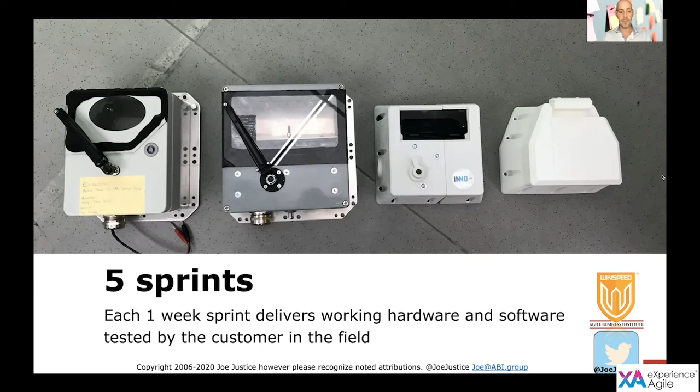It went for sale. The point I'm trying to make, a sprint in hardware does mean it is deployed and it is being used by the customer for real feedback. And these are 1 week sprints, and in 5 sprints, hardware, software, electronics are deployed to complete the products for sale. Here's what it looks like in manufacturing.

Well, it's robotic integration. The robots have flexible hands, so they can hold different parts because they're getting different parts 27 or more times a day. So the robot hands need to be programmed to hold the different part, and then they connect them. Next, the mating surfaces on the parts have known stable interfaces. You can see they're mostly flat to simplify the mating, the connection of the parts, but they're not all flat. As long as the interface is the same, the rest of the part can change as many times as it wants, and the parts will still connect.

Now, that said, the interfaces in practice do change, and very often. The teams working on all parts that share an interface need to agree when the interface will change so that the car will still integrate and pass integration testing.

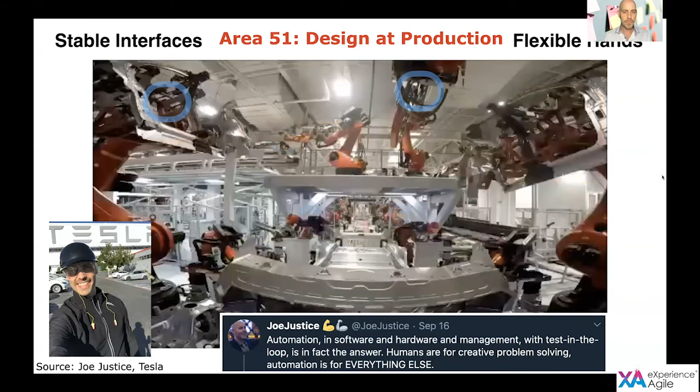In traditional manufacturing, if we look down at the manufacturing facility, the factory, you see trucks unload stock and it flows in what's called single one-piece continuous flow as the product is built by aggregation. Then for final testing, it's brought into a test laboratory, or typically 1 out of every 1,000 parts is brought into a test laboratory, and then it's brought in trucks for deliveries.

This is the aspiration of the Toyota production system. The Toyota production system strives for single one-piece continuous flow. The challenge is, if you make a change to what's being produced, each step potentially in this flow needs to be reevaluated and retested. So change is expensive.

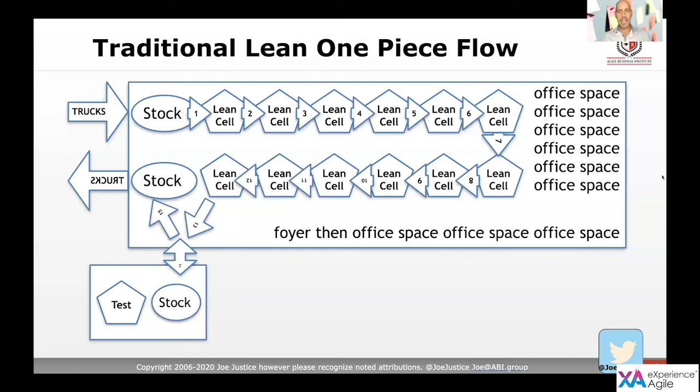If we want agile hardware, if we want fast, rapid, inexpensive, low-risk change, we have a very different structure. We have what's called a stock backplane. This is a wide fanning out warehouse with people pulling carts of product or automated trolleys. Those parts are then shifted in real time to where they're needed. There's not single one-piece continuous flow. It's too slow for new product introduction and new product innovation. Instead, parts come on demand and what comes changes more than 27 times a day.

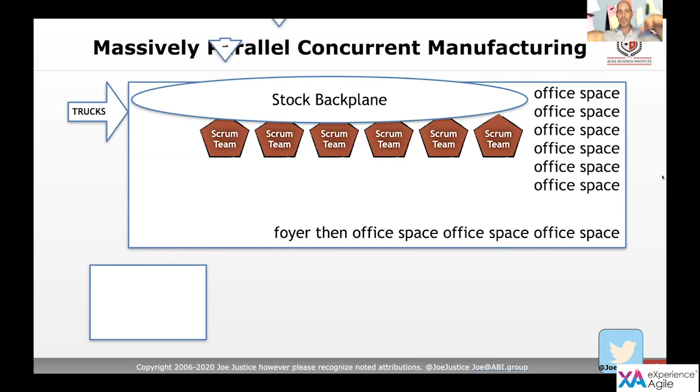Those are then brought into cross-functional teams that do design, manufacturing, engineering, and the prototyping, manufacturing, and deploying to the prototype line, which are in fact the prototype line. So stock flows from the stock backplane. It's built in modules in parallel, and that flows to what's called the stock front plane, which is the integration point. All teams must connect their products into all the other modules before it's considered done.

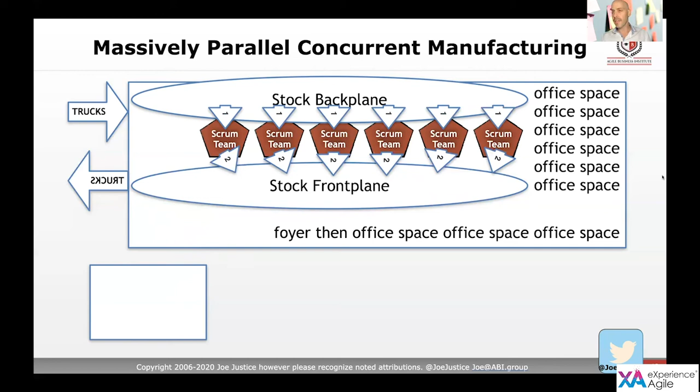For details on exactly how this works, I highly recommend Paolo Sammicheli's book, Scrum for Hardware. The second half of the book is the technical practices that make agile hardware work, which I'll call extreme manufacturing.

This works in construction as well. During COVID-19, hospitals were asked to be increased in capacity and built entirely new in 3-week sprints. Companies that previously had said they can only manufacture in multiple year cycles started deploying hospitals in sprints.

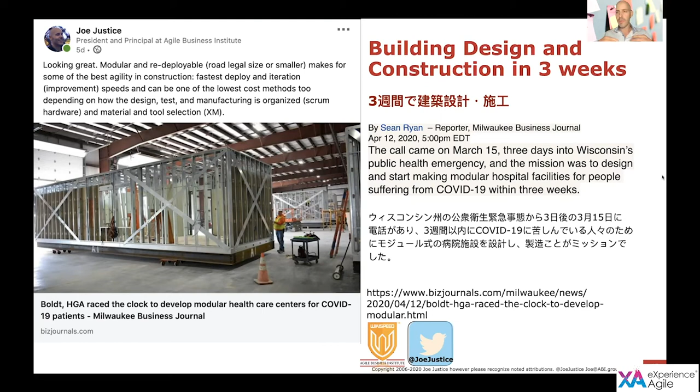The method to do that is modules at a time that are complete, including heating, ventilation, air conditioning, and cooling, HVAC. They're including operational hospital beds. They're full functional hospital units. They're not isolated components. Those are built in 3-week sprints or faster. Then those are stacked side by side and stacked on top of each other. And this is, of course, how agile companies are building their factories now.

In fact, it's even more aggressive than that. As soon as the property is owned, tents are erected and manufacturing starts in the tents. Then the building, one cube at a time, a module XY, is built over the tents, and then the tent is taken down and manufacturing starts working in the cleaner environment of the factory cube. That's while the next factory cube is being built and it's deployed in module XY.

There are also tents around it where even more work is happening. Peter Stevens and I have had a very fun Twitter exchange, and one of them is, you don't have to exchange flexibility for predictability if you have known stable interfaces. This, of course, works in aviation, and I've had the privilege to work with the F-35 Joint Strike Fighter team, the F-22 Joint Strike Fighter team, and the Saab Gripen Joint Strike Fighter team.

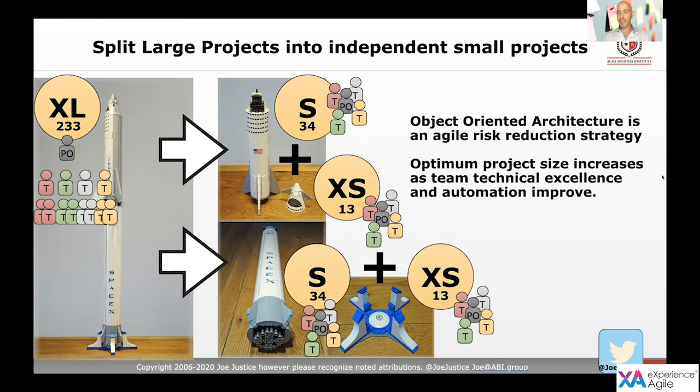Again, the first method to get a radical increase in speed in hardware is to take extra large projects and split them into many small and extra small projects. In this way, the agile architecture of the system is the gating factor for speed. This only works if the modules are able to be executed in parallel. For that to happen, they need a known stable interface. This is exactly what SpaceX does.

They make new Merlin engines every single week, and every single one is an improvement or an attempted improvement on the version before. Elon Musk famously said, "We've never made 2 engines the same." And it's true. It's a constant stream of new innovation. So you have 27 extra small projects, none of which are redundant. Innovation never stops. It's constant deployment of new hardware in this production line of these 27 Merlin engines. Once there are 27, they're composed into 3 Falcon 9s, and when 3 Falcon 9s are composed, they can be composed into a Falcon Heavy. And this is how they launch new rockets in less than a week.

This is exactly what the Standish Group has been trying to teach us since 1985. The Standish Group tracks project success across hardware, finance, software, furniture, medical devices, and others. They track them all over the world. A primary metric: was the project big planning up front with one attempted large deployment, or was it a sequence of small projects with small deployments that add up to a large deployment? That we'll call waterfall, big planning up front, versus agile, permission to change in small projects.